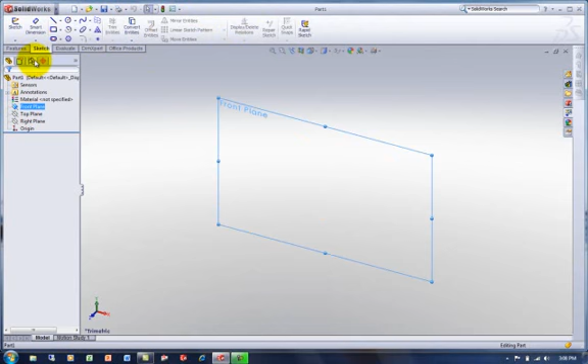I'm just going to start with a line, and I'm just doodling out kind of the shape that I have in mind. I do have a particular part in mind, so I'm just drawing the outline of it.

Not that exciting to watch, I'm sure.

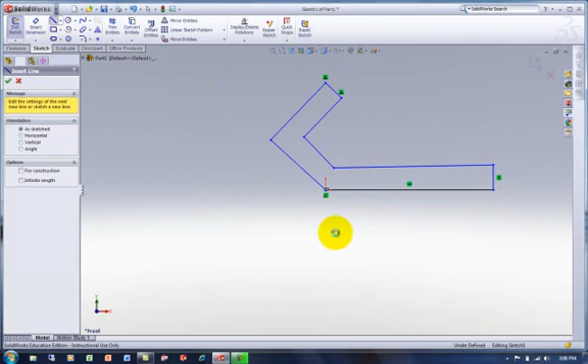Need some of these lines controlled. That guy should be horizontal, and I want these two to be parallel. Before I do that, I think I'll put a dimension on there for angle so I get exactly the angle I want, 45 degrees. Make that one parallel to that.

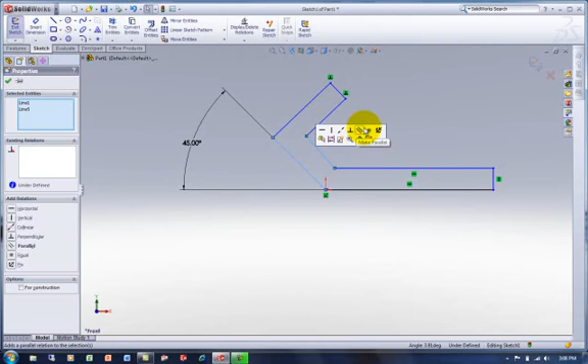The part is actually starting to take shape. It's a little squatty or shorter than I had in mind here. I'm not going to worry too much about its exact dimensions in this case. I'll add some if I need them, but right now I'm mainly just looking for the shape.

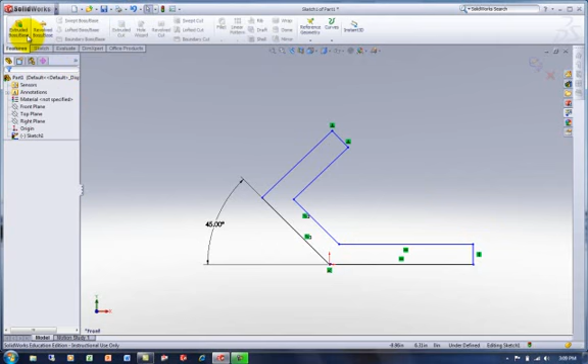So that's basically it. Now I'm going to take that shape and extrude it. So that's our first feature, extrude boss base. And I'm going to extrude him so he's 3.5 inches across.

Now the next phase of this is I'd kind of like a rounded tip on this guy, and I'm going to end up with a couple of raised bosses on this guy and a few slots and cutouts and holes and other kinds of features. It'll give us a chance to practice the basic features.

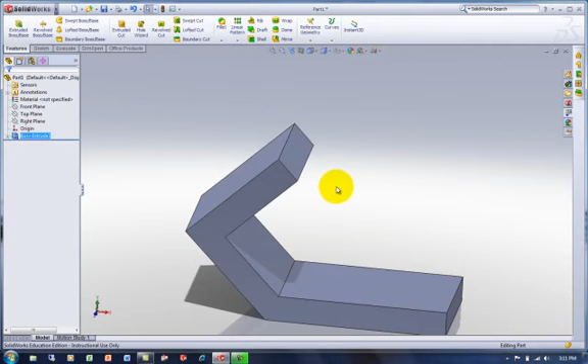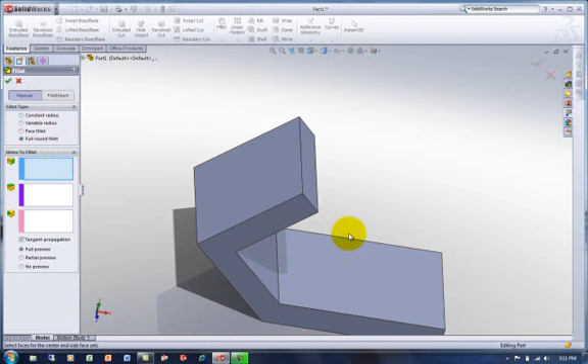So first thing I'm going to do is round this off, and a great way to round something off so that it is full tangent is to go ahead and use the fillet command and set it to full round fillet. A lot of people know about the basic fillet commands and go out and fillet things manually, but this is a great one for just rounding off an end so that it matches the tangent of the width.

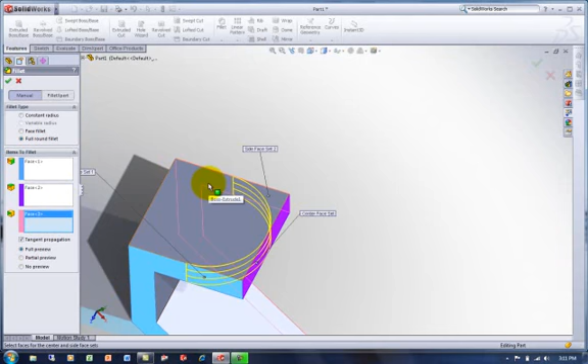All it takes is you pick the first box, pick a side, pick the next box down, pick the next side, pick the next box, and you can probably guess, flip over the other side, grab the next one. And now you can see in the preview that it's going to give us a nice rounded end. This width could be whatever you want it to be, and it's going to match that radius with a tangent. So that's pretty much what I had in mind.

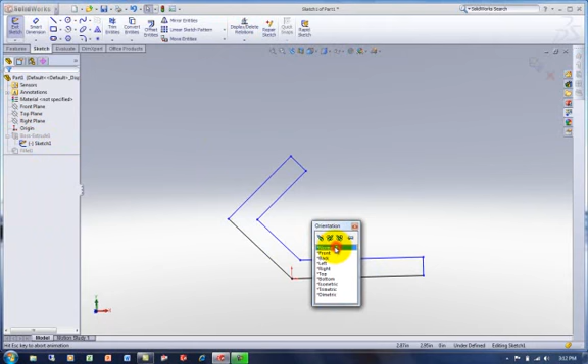Now that I actually see it trimmed off, though, I want that a little longer. So I'm going back to the original sketch, edit that, look straight at it, and just stretch that guy out a little bit.

That might be a little extreme. How about that? Okay. And it adjusts with it because it's radiusing the end. Wherever the end ended up being, that was the 3 sides we grabbed.

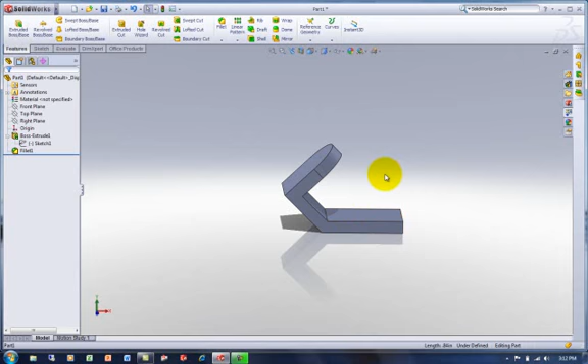So next thing I want to do is build a couple of bosses back here. They're going to be kind of this raised boss platform with a rounded top on it, which is hard to describe until we just model it. So I'm going to use a similar technique - I'm going to build a basic box, a cube, on this surface.

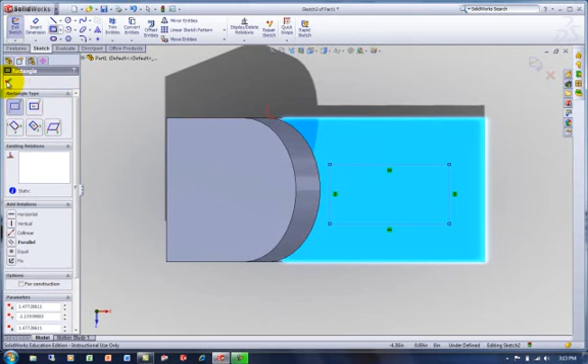And I'm going to extrude that. I'm not worried too much about locations and things right now, just so we can get through the basic operations. That's a little taller than I have in mind. I'm kind of thinking something like that.

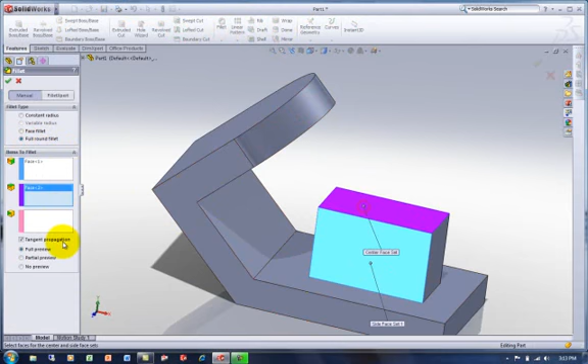So once I've got that built, I can do a similar process as I did here, basically the same process. Just go to the fillet command - it's still set to full round fillet because that's the last kind we did. Pick a side, which is this one. Pick another side, this one. Pick the last side, this one over here. Okay, that's what I want. So I check and say OK.

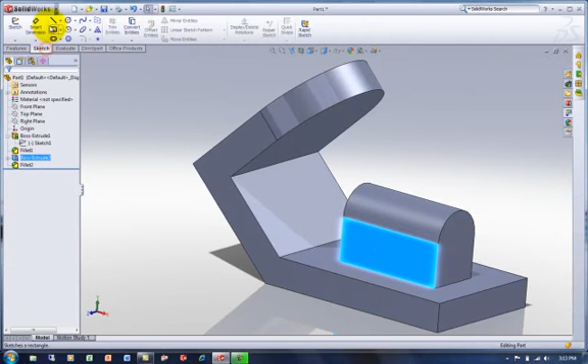Now, the way this particular design works, it actually ends up being kind of two separate bosses with a cutout in between. So I'm going to put a sketch on this surface, rectangle, and I'm just eyeballing about where I want that to be. I can dimension these things later or as I go if I have the numbers. I'm going to turn that so I look - yeah, that looks pretty good.

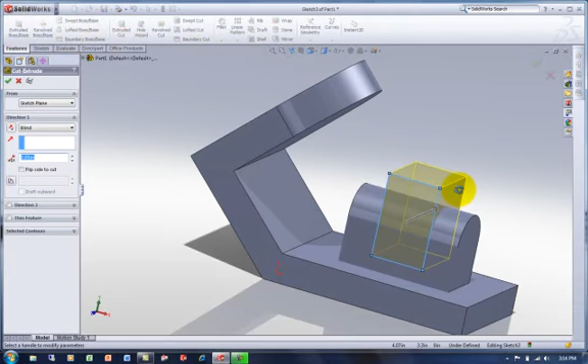Go to the features - now we're going to do extruded cut. We're extruding, but it's not going to be a solid, it's a cut. So we extrude a cut, and we want it to go through the whole thing. So I'm going to switch this from blind to through all. Now it's really actually important that you think about whether you want to do that.

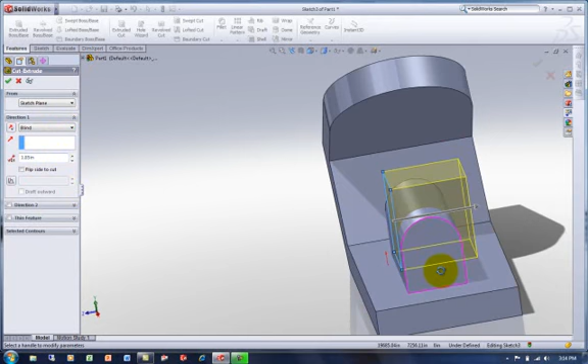If I leave it at blind, which is the default, it stops at whatever depth is set, and you can set it to whatever number you want or leave it as is. In my case, it goes all the way through that humped piece, but what if in the future this boss gets enlarged, or the whole part gets enlarged, and now this thing is three times as wide?

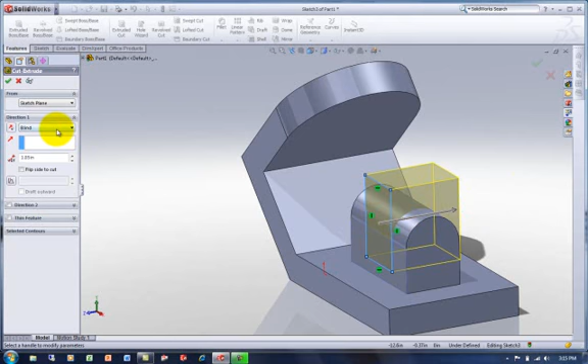Well, now my depth of cut will stop where it's stopping now, so it won't really go all the way through. I'm going to assume that for future design modification and use of this part, it will need to cut all the way across. So to do that, switch over to through all. It doesn't make any difference how long this is now - whatever width, the cut goes through all. I'll accept that, and now we see the notch cut out there.

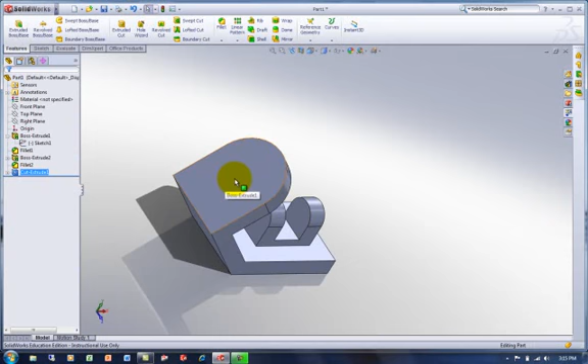Next, I'm going to put a counterbore hole in this location. I'll put a sketch on that surface, go to circle, touch this outside arc so the center lights up, go out there and grab that point, and doodle the small diameter hole. I'm not worrying about sizes on this one - I can change them later.

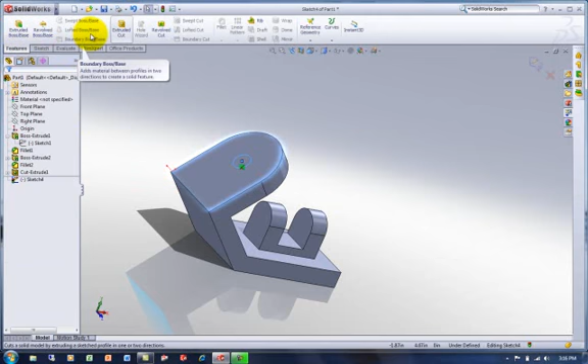I want to do a feature, another extruded cut. Now this time if I said through all, that would go right through the whole part - I don't want that. So I'm going to switch it to up to next, in this box for direction, to next. Then just accept it. And now we have the small hole.

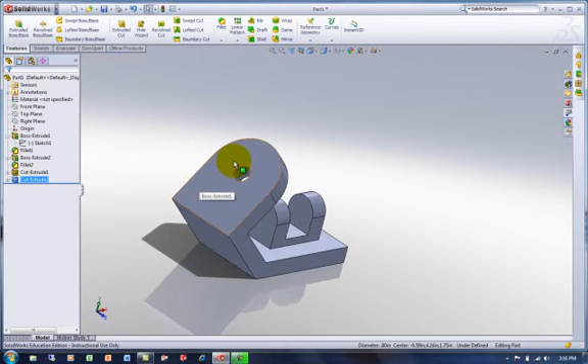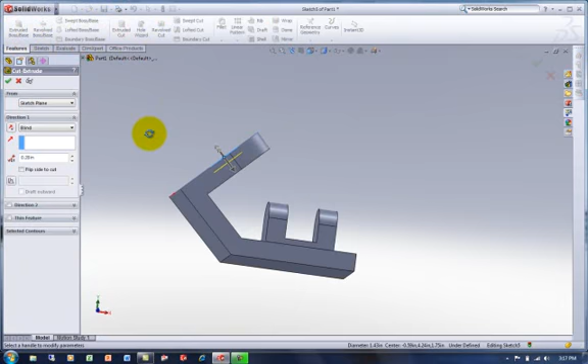This is supposed to be a counterbore hole, so I'll start a sketch on that same plane, go to circle, touch that, grab its center, for whatever diameter the counterbore is supposed to be. Features, extruded cut - now because it's a counterbore, we don't want it going through, we want it to go whatever depth it needs. I'm eyeballing that, and we'll take it. Now we have a counterbore hole there.

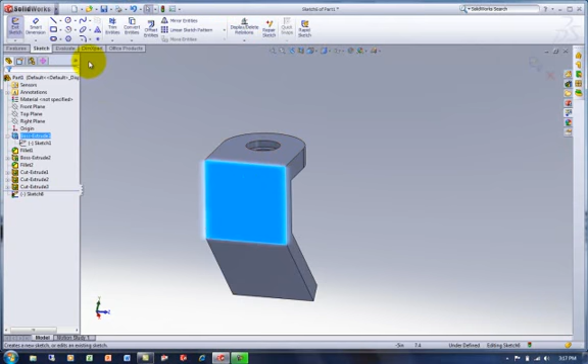I want to put some slots in here. There's a straight slot here and more of a tapered wall slot here, so I'll do the easy straight one first. I'll start a sketch on this plane, start with a rectangle, and look straight at it so I can get the proportion idea - I want to see it in relation to the hole.

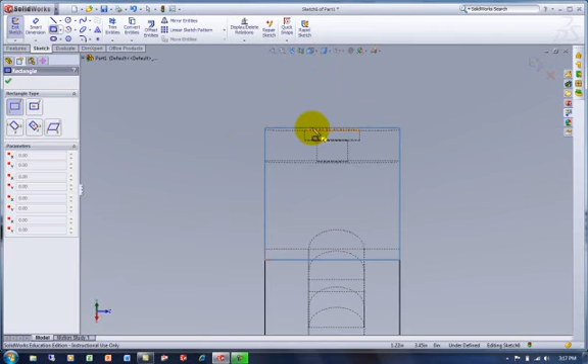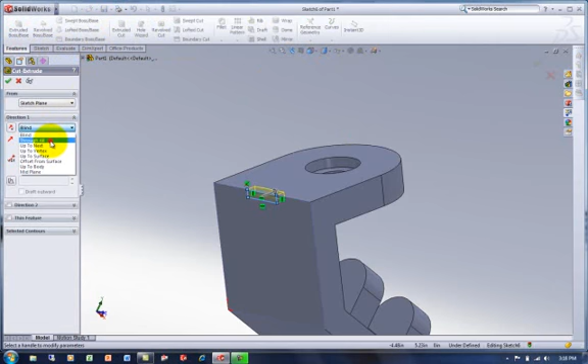So in order to see the hole, I'll switch up here to display style and go down to hidden. Now I can see where that hole is. Remember, it was eyeballed, so I'm kind of eyeballing this rectangle as well. I'm just going to make a groove that goes partway through all this - a slot. Let's tip that so we can see it, switch back to shade mode so you can really see it, and go to features, extruded cut. You can probably guess the next thing I'd do is go to through all - then no matter what happens with this length, it will cut through all. Accept that cut.

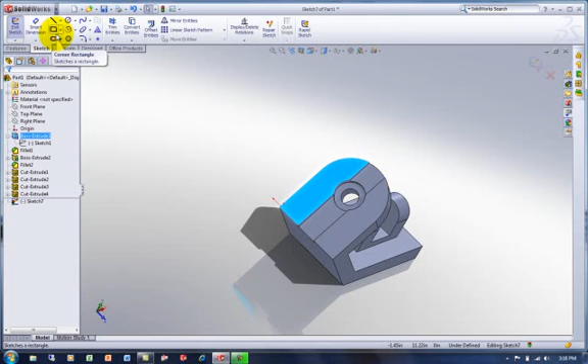Okay, looking pretty good, we're getting some details to this simple object. Next I want to put a sketch on this surface to start this other groove, this other slot. I won't go rectangle this time, I'll go to a straight line. I'll look straight at it, and turn on hidden lines again so I can see proportionally where I am.

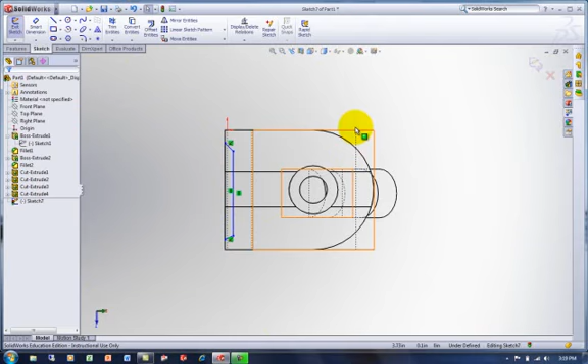I'm just going to touch this outside, give it this angled depth I have in mind - just eyeballing proportionally. Go ahead and close that up, and then let's look at that and see - is it kind of what I have in mind? Yeah, it's this open groove with slanted rails on the side.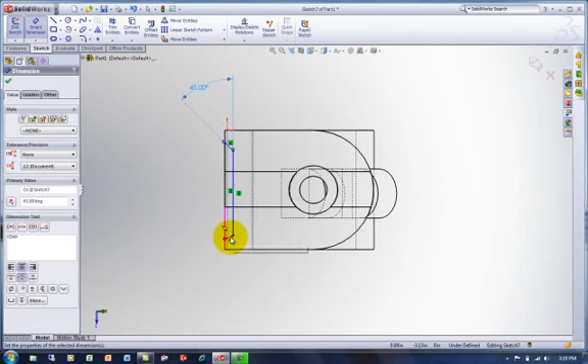I'm going to look at it straight on again so I can get the angles a little better. I'm actually going to dimension the angle - this is the one looking a little closer to what I have in mind. Let's see... actually that's pretty darn close, 45 degrees will work. So now I want to make this other one 45 degrees as well. Just remember to grab whatever you're dimensioning from off the same locations - in other words, move this around until you see the 45 you're looking for, or whatever number it is.

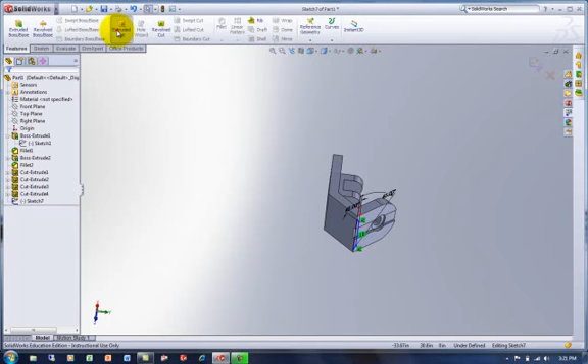Okay, he's ready to cut. So features, extruded cut, we want to go through all. And now we've got that notch cut in there.

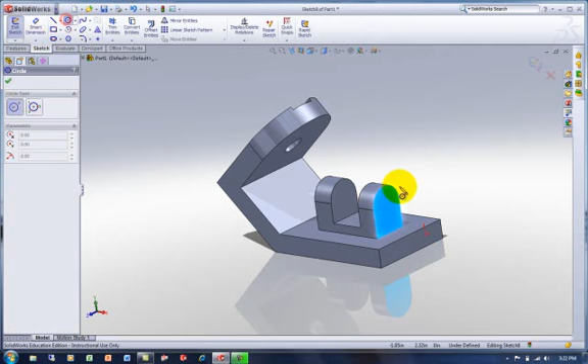So next thing I want to do is punch a hole through these guys. If I grab hold of that surface, put a sketch on it, go to circle, and light up that center point feature - there's my hole to go through, features, extruded cut.

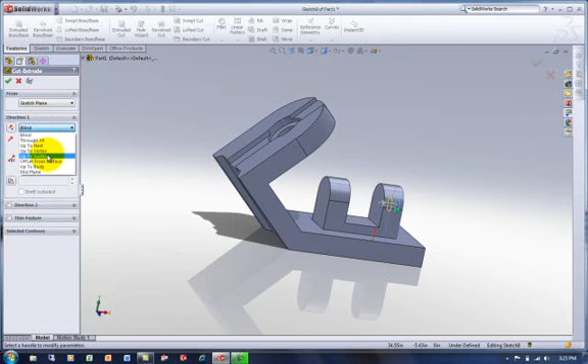This time I'll go up to surface instead of up to next, which would stop here - through all would go through everything. I'm going to grab up to surface and tell it to punch the hole up to this surface. Say OK.